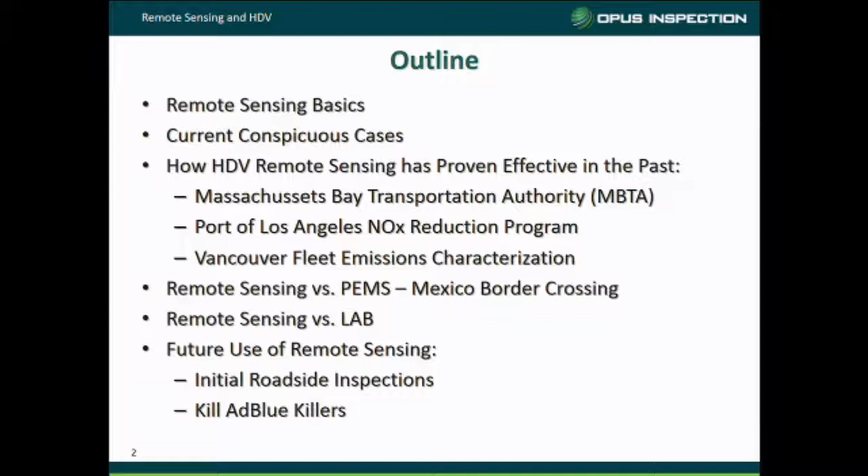Just a few words about the company. OPUS Inspection is a Swedish-American company with a German CEO. It's purely an inspection service company—we even sold our equipment division, to be clear on that. We have more than 1,200 employees and are the market leader in the United States and Sweden, with operations in 22 of the US states and various other countries across Europe, Latin America, and Asia. Among this, the commercial hub for remote sensing in Spain, recently acquired.

So what is remote sensing about? The measuring principle is infrared and ultraviolet light, which crosses the plume 100 times within half a second. The infrared measures HC, evaporative HC, CO, and the coarse particulate matter as a concentration of CO2. And the ultraviolet light measures the NOx, separate NO and NO2, and the fine particulate matter, because it has a wavelength of 230 nanometers, which is lower than the traditional green light used for opacimeters.

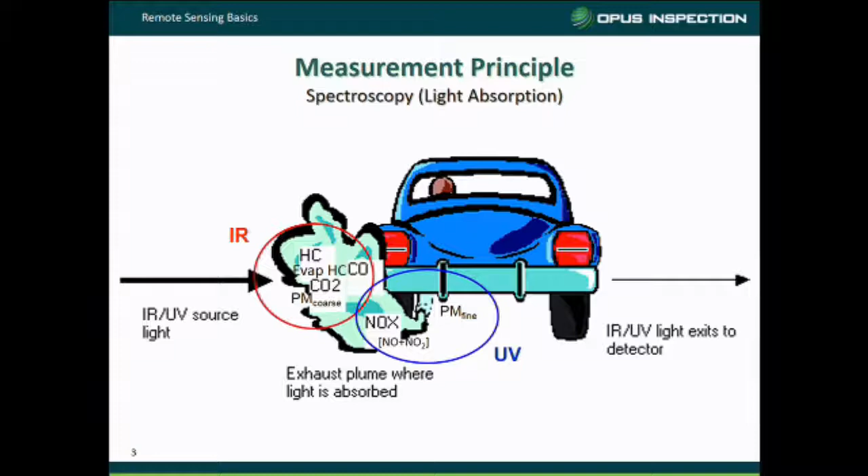So the light goes across the street. It's returned by a corner cube mirror across the side, goes back into the analyzer in the same box. And at the same time, the speed, acceleration, and slope are measured in order to have the kinetic conditions.

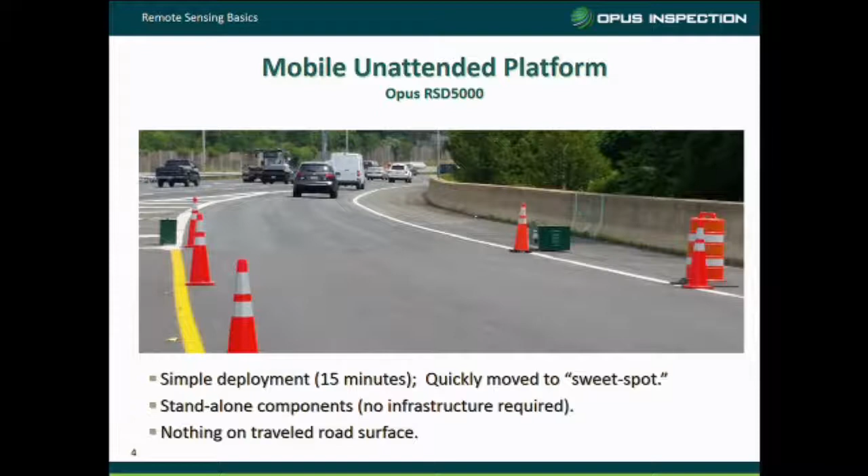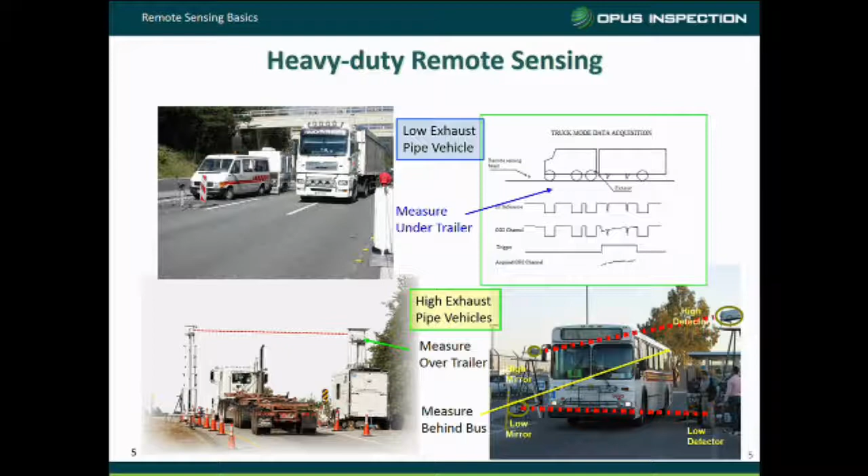With light-duty vehicles, the number plate is taken, and you can get the typical mass from the registration data. For heavy-duty vehicles, it's necessary to go via a weigh-in-motion system to know the load weight of the full lorry, because that makes a big difference for the vehicle-specific power at the moment of measurement. In the United States, the exhaust pipes often go up on the vehicle, so it's often measured both at the bottom and at the top for heavy-duty vehicles, because that is of special interest. I'm showing that to you.

But the general takeaway for remote sensing is that it is an actual measurement on the road. So you measure vehicles where they pollute, and you screen masses of them. That's the specific advantage of remote sensing, not only single ones.

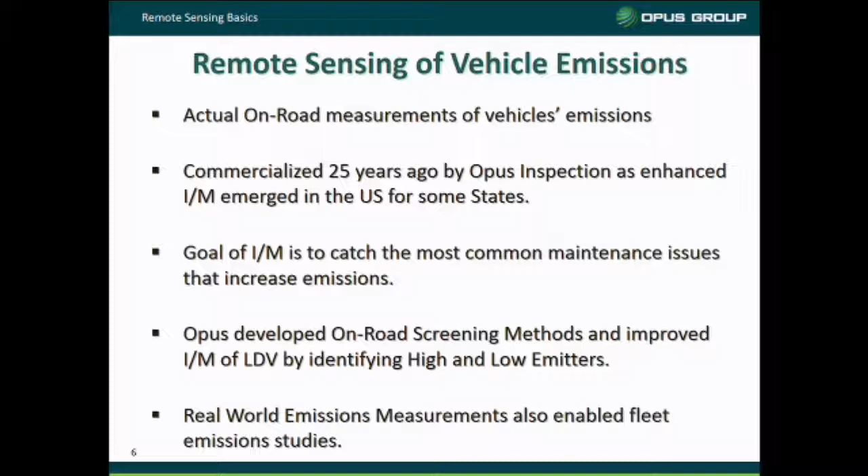It has been developed in order to enhance the inspection and maintenance programs in the US, which have been activated 25 years ago. The goal is to identify those vehicles with common maintenance issues that increase emissions. And while we have been applying that methodology over time, you see degradation of vehicles over time. You can analyze whole fleets of vehicles in particular metropolitan areas, so that is a very good basis to do data mining.

Now, what is actually the reason we in Europe should care about remote sensing? Diesel manipulation has a long tradition. It has been going on in the United States, of course, as the country of origin of cleaning exhaust. Also, fraud has taken its inception, and the first big scandal was in the 90s, which was settled for one of the highest settlements of the time, $1 billion, against 7 producers of diesel heavy-duty vehicles: Cummins, Caterpillar, Detroit Diesel, Volvo, Mack Trucks, Renault, and Navistar.

Since then, other technologies have been used, so diesel particulate filter, exhaust gas recirculation, and of course SCR, but all have been tampered with. There's the example mentioned of a fine of only $500,000 for a company called Edge Products in 2013 for having removed 9,000 diesel particulate filters.

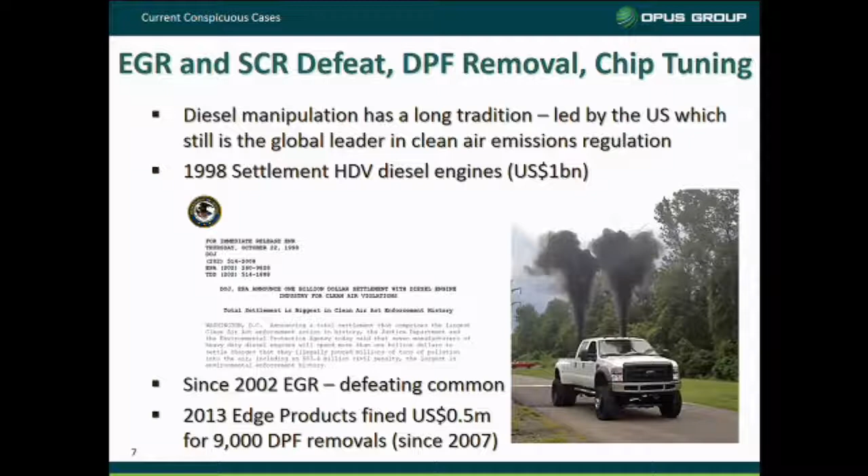In Europe, it's becoming fancy now as well, and it has become more known by the general public through a TV emission produced by the German channel ZDF. They went in a clandestine way to Romania and had somebody present himself as a truck owner who wanted to remove the SCR. It's all filmed, a nice half-hour film, good fun. And it was no problem whatsoever to get that done.

They were even so kind as to implement a Poland switch, as they called it, because the Polish, for certainly a good reason, are more aware than other parts of Europe that this exists. So when you approach, as such a driver, a Polish police patrol on the highway, you switch on your SCR switch, and the Polish have more difficulty finding out that you are not using your SCR normally. It's called the fairy tale of the clean heavy-duty vehicle. The film is available on that link.

In Germany, road tolls are dependent on the emissions class of the truck. So these drivers pollute as a Euro 1 vehicle, and they pay the road toll as a Euro 6 truck. Specialists have calculated that this makes a loss to the German budget of 110 million euros.

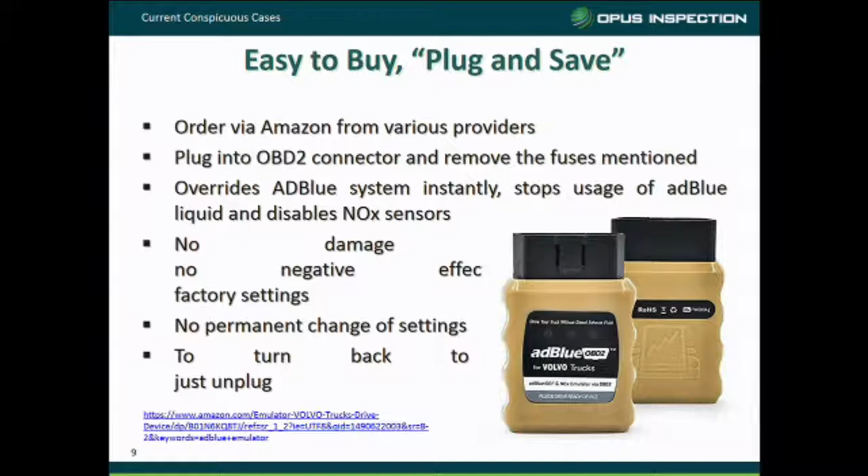So that's the reason why we should talk about remote sensing more intensively, I think.

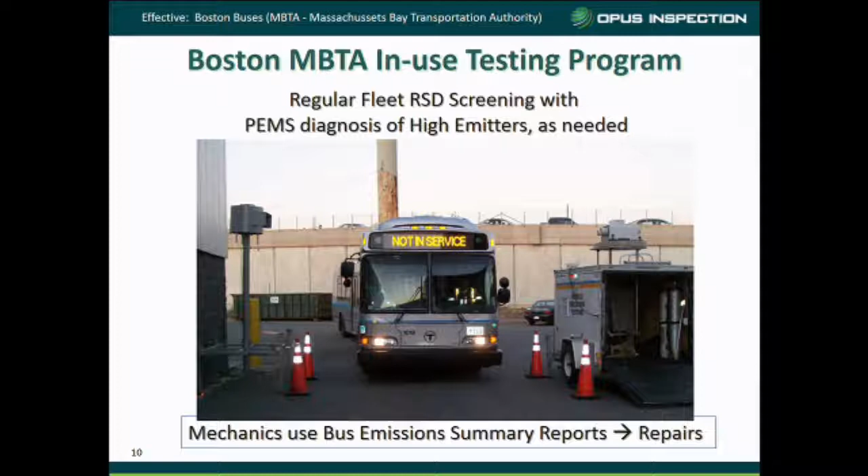Now the historic examples. In Boston, environmentalists and people in general were complaining about the buses because they were so dirty. So the Massachusetts Bay Transportation Authority came to see us and asked us what they could do about it. We gave them two fixed installations in two of the depots to measure their fleet constantly, and a couple of movable units rotating among the other six depots.

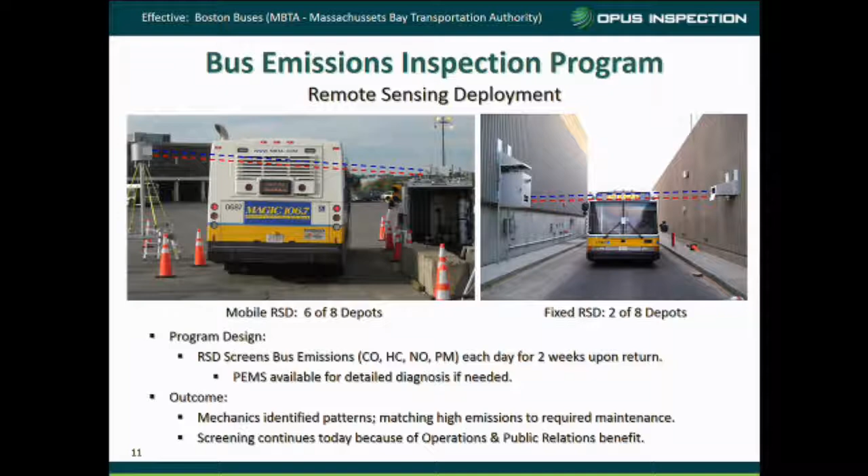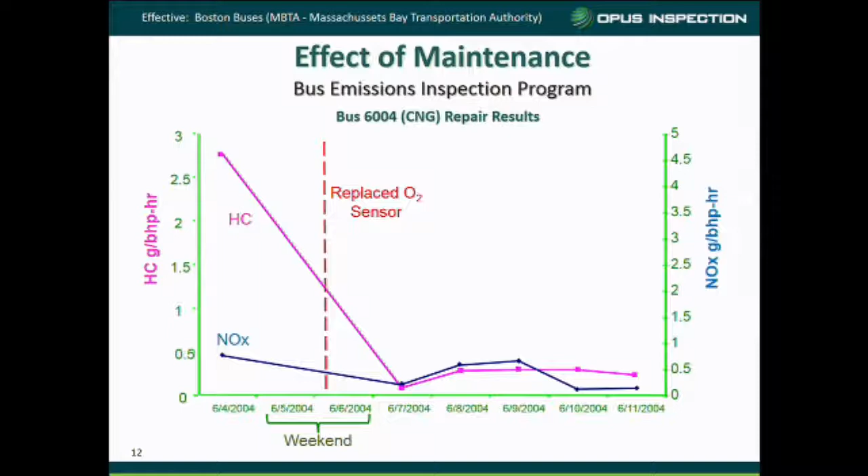And that way, the mechanics learned to read the emission profiles of the buses. Here, for example, there was a very high HC curve on the left hand, and over the weekend they replaced the O2 sensor, and afterwards the emission curve was in order again. They have trimester reporting cards on that, which are still in use. That was 10 years ago now.

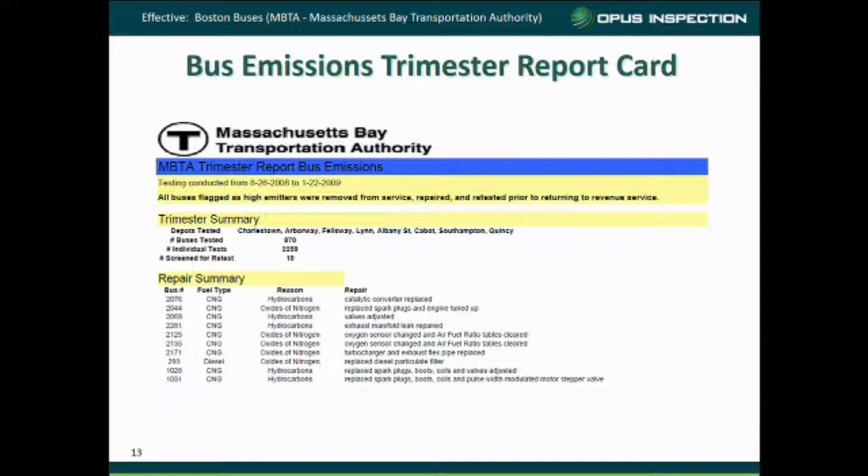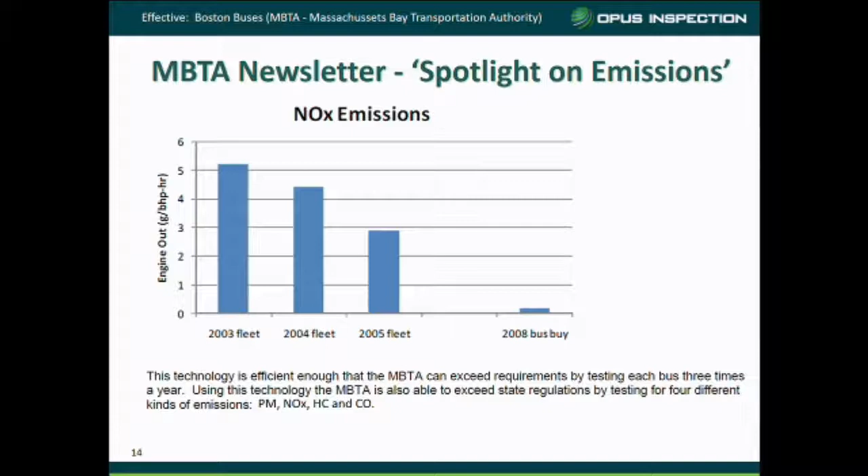And they put them onto the internet for many years. Currently it's still being practiced, but it's not monitored as much live. In the newsletter in 2008, they were proud to show how the fleet had improved with these measures, with this increased awareness of pollutants - that's the NOx emissions. You see, after 5 years, it's just a small fraction of what it was in 2003. And for particulate matter, it's a little more, but still very considerable what has come down.

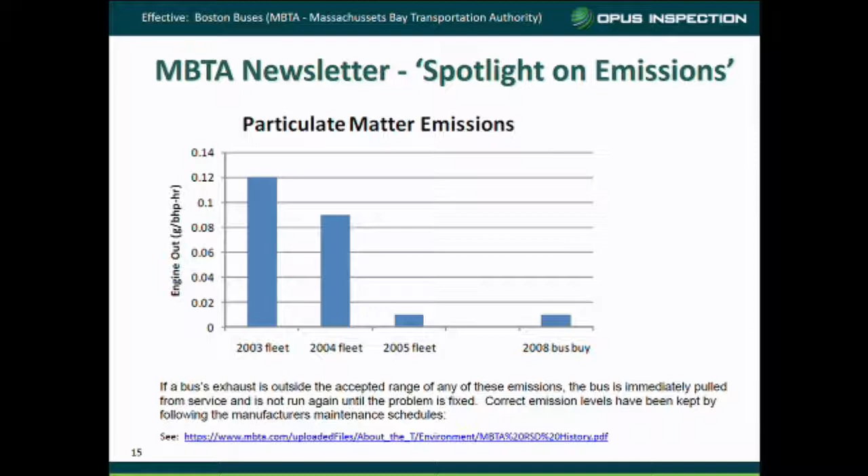Now the second example. At the Port of Los Angeles, people living close to the port were complaining about the bad air. We set up the following exercise together with the University of Denver, which actually developed this technology - Don Stedman - and has licensed it to OPUS Inspection, and we are the commercial users of it. So we had this one station at the Port of Los Angeles, and another one on the road somewhere in the country where trucks pass after hours of driving, under very hot conditions.

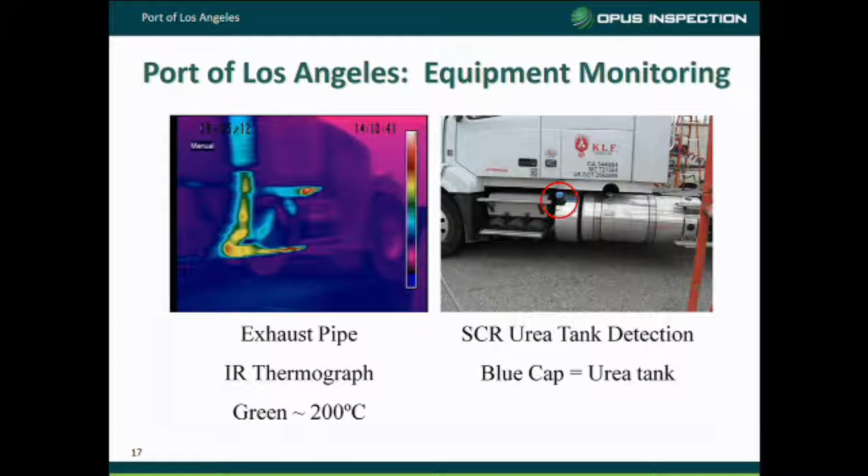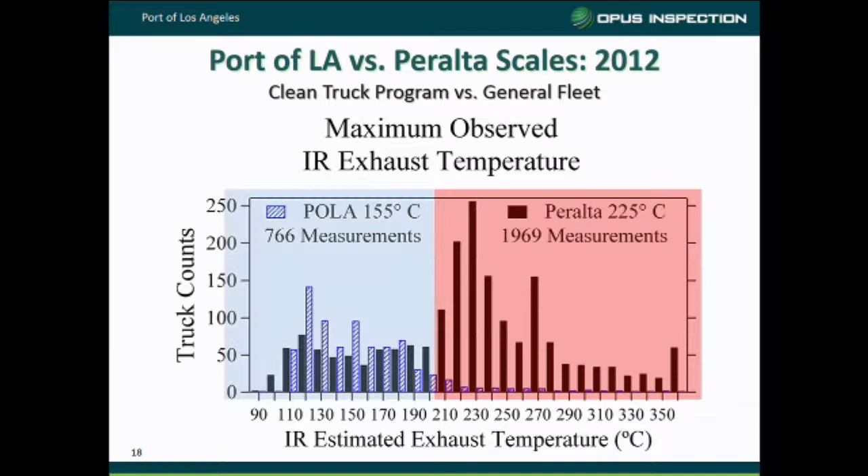At the Port of Los Angeles, something exceptional was implemented: a thermograph camera and urea tank detection in order to identify trucks with SCR. The thermograph showed that at the Port of Los Angeles, the average exhaust temperature was only 155 degrees Celsius, whereas at the Peralta weighing station, out in the countryside, the average temperature was 225 degrees Celsius.

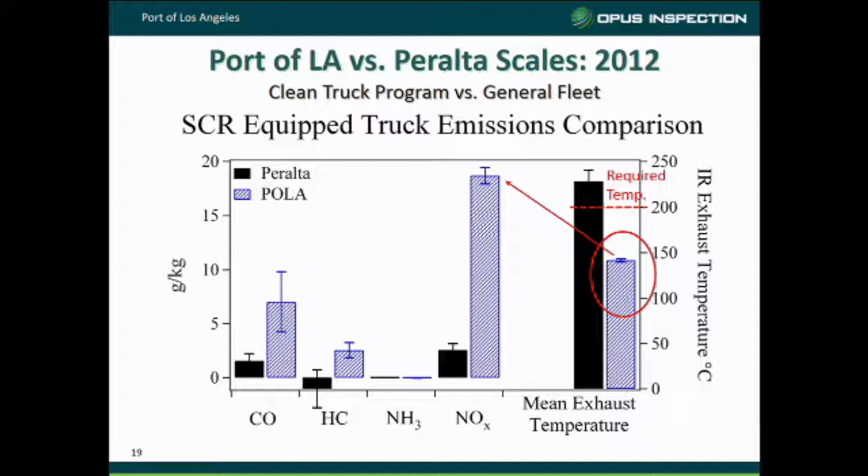Even though it was the same vehicle fleet coming by, you see in the blue sections, the Port of Los Angeles had much higher emissions of CO and NOx, and on the right-hand side, the mean temperatures are the reason. So the reason was identified why the pollution was so high at the Port of Los Angeles.

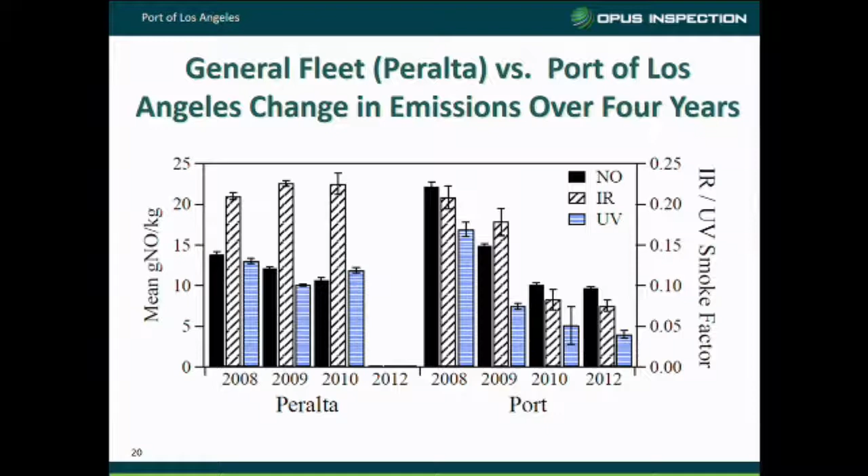Consequence was that over time, trucks admitted to the port had to be more modern, had to have better pollution control, and you see on the right-hand side in the columns the pollution going down considerably, at least by 80% or so for the smoke factors, and a considerable part for NOx.

Concentrating on the second part of that chart, 3 heavy-duty diesel groups were identified. Those 2007 and older had high particulate matter, high NOx. Those from 2008 to 2010 had low particulate matter, somewhat lower NOx. Those 2011 and younger had low particulate matter, mostly low NOx.

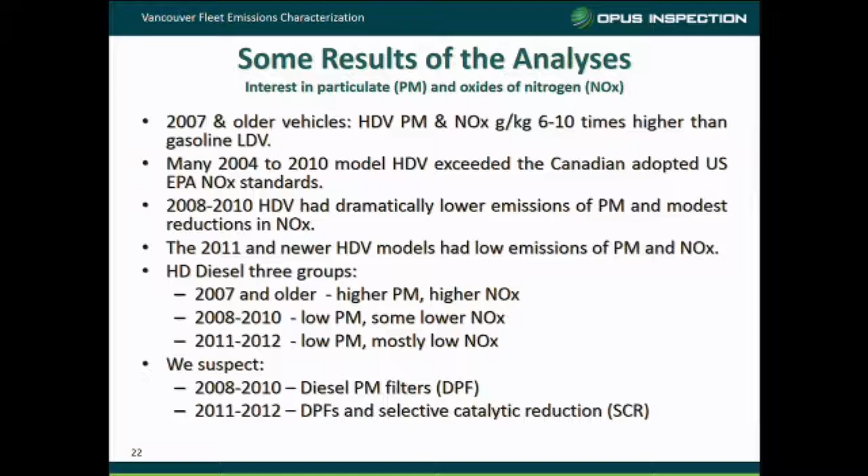So that was obviously the introduction of the diesel particulate filter as of 2007-2008, effective, and the selective catalytic reduction starting 2011.

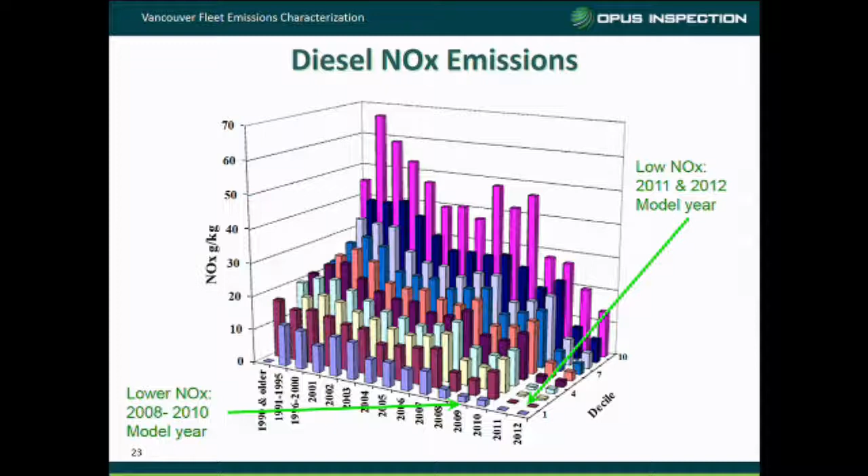In detail, in deciles distributed, you see that until 2007 or 2008 the NOx was quite high, and then in 2008 it comes down somewhat. Only in 2011, with the SCR, it really comes considerably down to almost zero for a larger part of it.

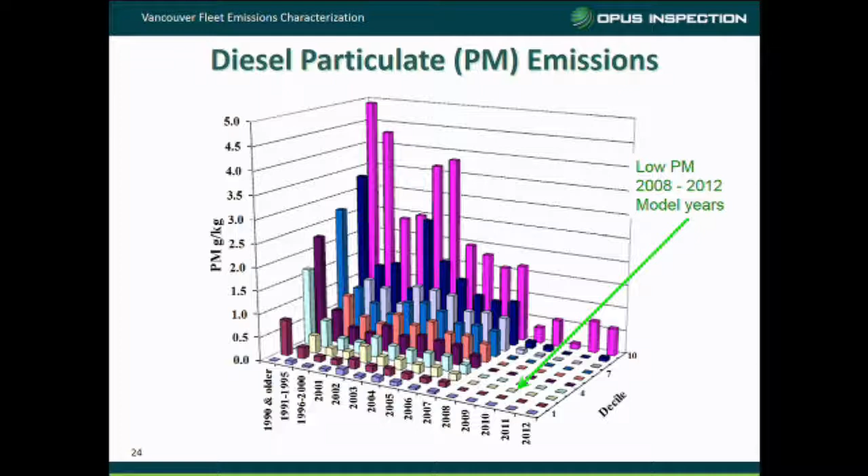For the particulate matter, it's even more impressive. Starting 2008, flat, and what you see in the background are, of course, the exceptions who need to be detected, who need to be repaired, or who have been tampered with.

So, considering the whole group of trucks which has been monitored, you see here the blue line, which shows those high in NOx, and the gray line, those high in particulate matter.

On the right hand, you have a red scale, which shows the percentage of high emitters among the measured vehicles. There you see, starting 1997, it goes considerably down until 2007-2008, and then again from about 10% in 2008-9, considerably lower to about 5%. So that also is the development we should wish for in Europe.

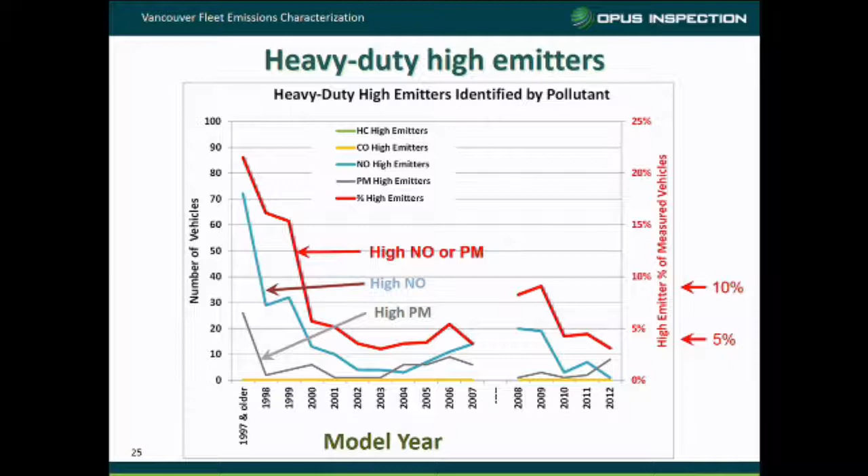Next question: how does remote sensing compare with PEMS? For that purpose, a special setup was created at the US-Mexican border, at the Mariposa port of entry, where many supposedly dirty Mexican trucks come in. They were first equipped here at Station 1 with the PEMS.

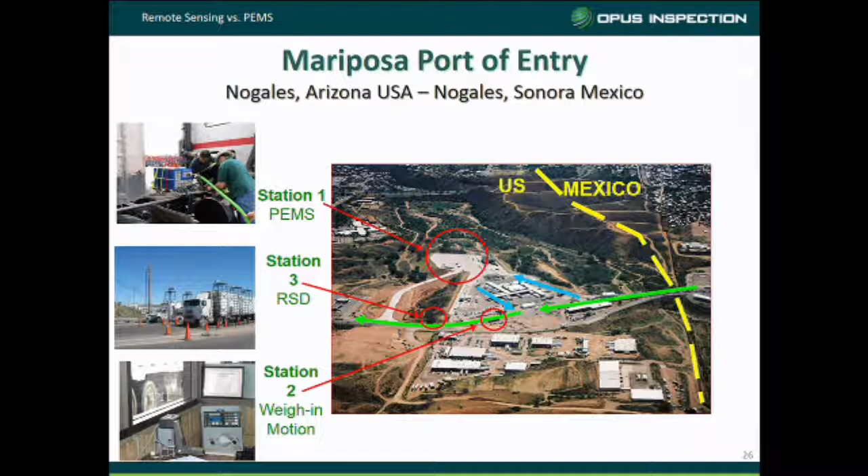At Station 2, they went over the weigh-in-motion. And at Station 3, there was a remote sensing device. In order to have sufficient data for measurement, these poor trucks had to circle through the remote sensing device again and again with the PEMS mounted on them.

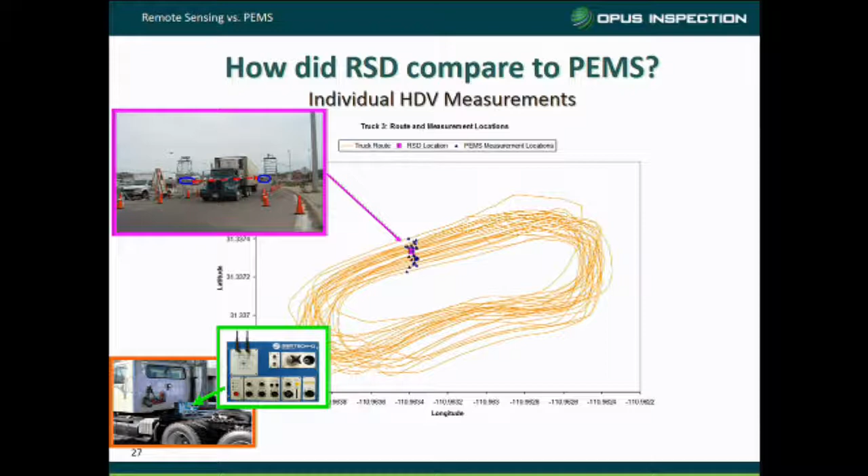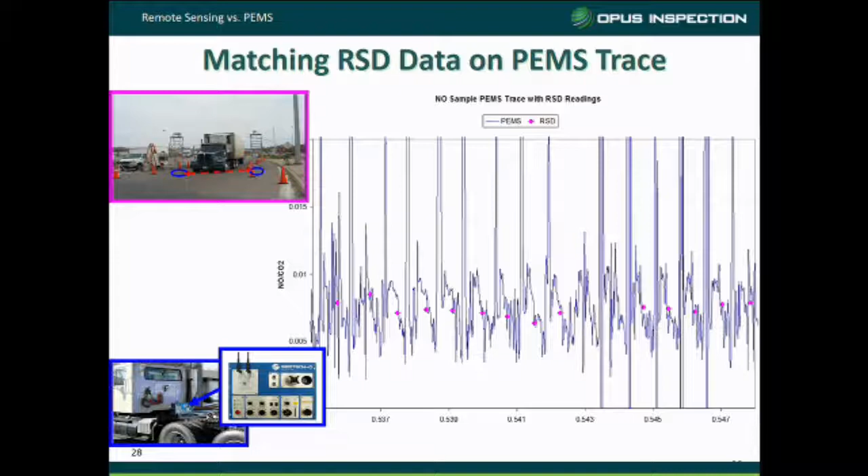That is the result of putting the pink dots of remote sensing measurements onto the continuous blue line of PEMS measurements. These are quite impressive hits. If you sum that up as a correlation, it's also quite convincing, I think.

Now, as an observation on the margin, in this exercise 15% of the trucks created almost 30% of the NOx, and 10% of the trucks created 30% of the smoke. So also a field where one could act to take out the most heavy polluters.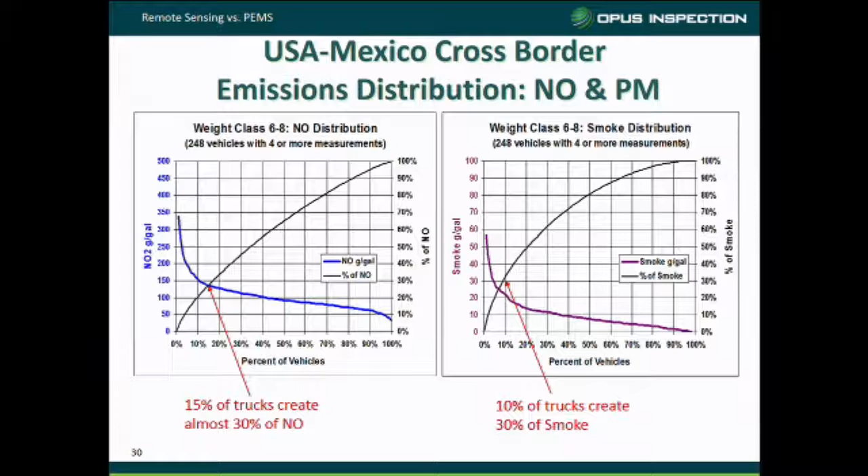Next question: how does remote sensing correlate with lab? That's the setup where that was measured in Japan, by the way, with a Horiba analyzer. Here you can see the measuring device, the sender of the light, and here the mirror for the remote sensing. So the exhaust fume went out here. It was measured both by the mirror and remote sensing device and the Horiba analyzer.

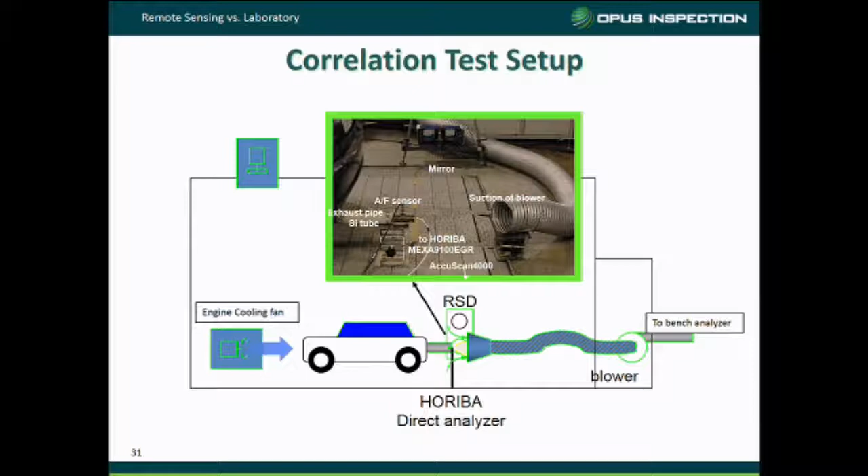And that is the curve which turned out for a Mitsubishi Lancer. Also sufficiently close, I should say.

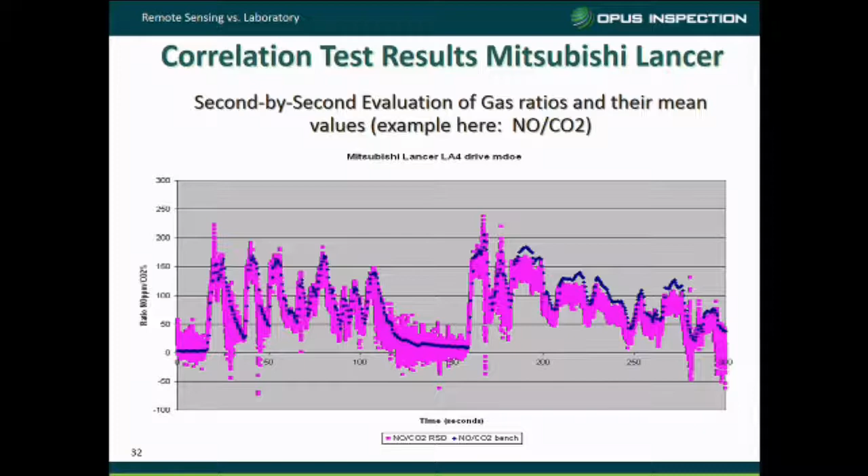So if the task now is to detect tampered vehicles, those who are supposed to have SCR and don't use it because they don't fill the AdBlue tank since they're manipulated, here is a graph showing how precisely the remote sensing methodology can discriminate. You have 97% of the trucks here, 6.6 liter trucks, 2013 and younger, equipped with SCR, showing NOx of less than 10 grams per kilogram fuel. Those who are older, 2007 and older, without SCR, have conspicuous NOx values, 96% more than 10 grams per kilogram fuel. So I think that is sufficiently precise to sort out those who are cheating.

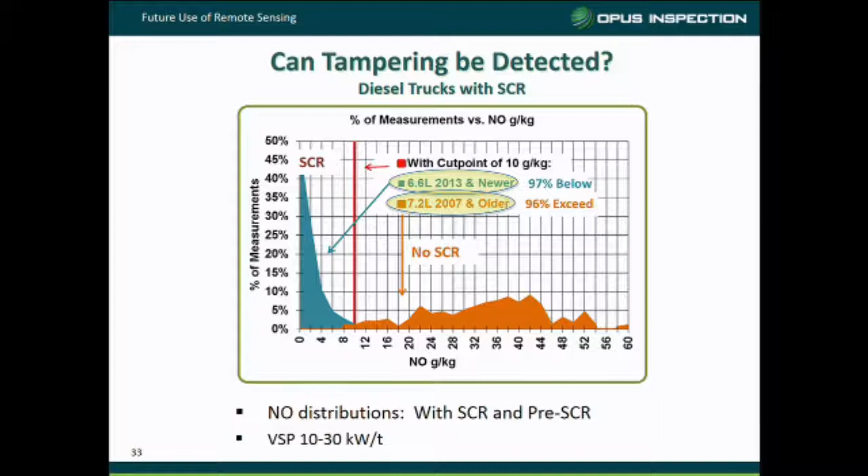And others believe the same. The International Council for Clean Transportation, ICCT, recommends in an April white paper to introduce remote sensing programs at local levels to make sure emission components are not tampered with, and also to determine if particular brands or models have higher than normal failure rates, and then investigate what the reasons are.

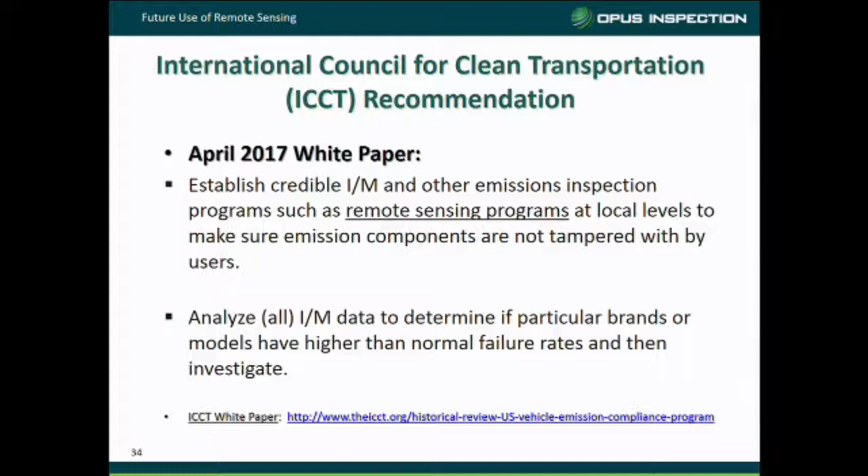Also, the associations have woken up. CITA, you probably know, is the Association of the Inspection Companies, and CORTE, you may not know, is the Association of the Road Surveillance Authorities. They have formed a joint working group on initial roadside inspections because the EU directive on periodic inspections leaves some space to be filled. So they have drafted and adopted guidelines for initial roadside inspections, explicitly stating at various places that remote sensing should be used to identify polluting trucks in order to pull them up and examine them further.

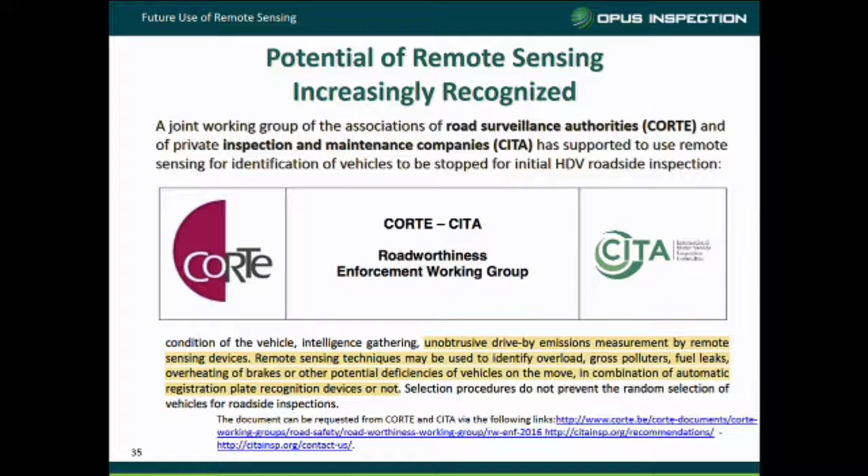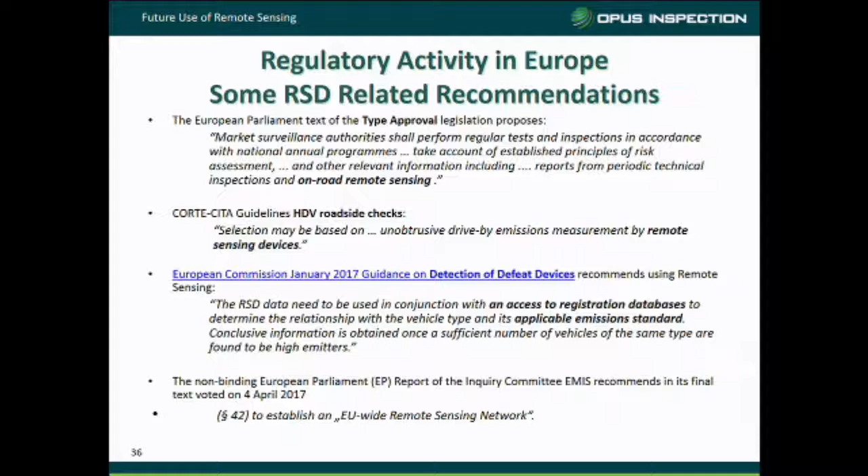That's not enough. Also the legislator and the European Commission have joined the movement. The European Parliament has explicitly said in its draft of the new type approval regulation that remote sensing results should be considered for further inspection. The European Commission even said in its guidelines of January on the detection of defeat devices that remote sensing is one of the methodologies they recommend to apply. And the inquiry committee of the European Parliament into emissions in the European automotive sector went as far as saying that an EU-wide remote sensing network should be established as one of the consequences of the VW scandal.

So summing up, the OPUS remote sensing technology can monitor vehicle emissions and their development over time on road, also in Europe. It has proven effective over the last 20 years in the United States. It is crucial, we haven't talked about this, that the equipment is mobile in order to really screen whole vehicle populations. You can't get them all if you just measure at one point, you need many points, for example 120 measuring points for a metropolitan area of 2.4 million vehicles.

The technology has helped to expose Dieselgate via data from Europe, which have been transferred by ICCT to the US. And it is likewise able to prevent further defeat devices from manufacturers, and it will also be able to identify tampering by owners or others. So remote sensing can complement OBD inspection, providing surveillance for compliance testing of the whole fleet.

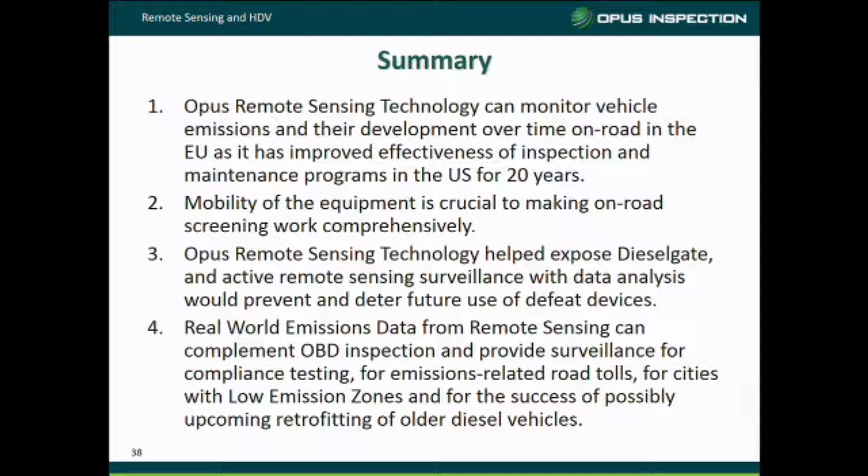It can help in enforcing emissions-related road tolls, enforcement of low emission zones in cities, and it can also very nicely accompany the success of possibly and hopefully upcoming retrofitting of older diesel vehicles. As I've read this afternoon, the German government is pressing hard the German manufacturers to do something now. Remote sensing is a technology which stops the guesswork about emissions - it's a technology to start knowing what happens on our streets. Thank you for your attention, and I'm open to questions.